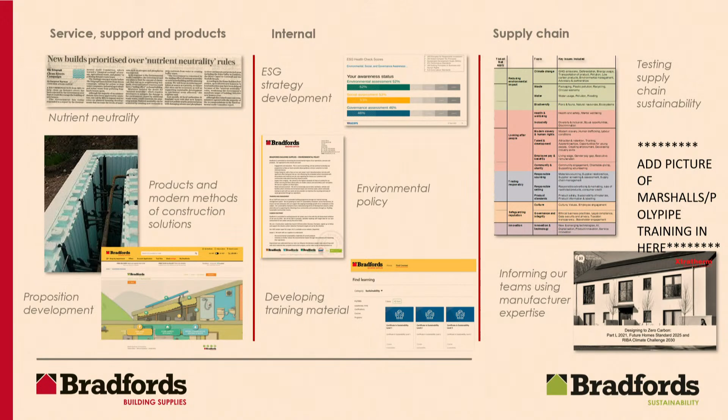You'll no doubt have seen in the press lots of bits and pieces around nutrient neutrality into watercourses. I'm very proud to stand here and say we're part of the group here in Somerset championing the effort to drive behaviour in government to unlock the moratorium on planning that's going on. So that's part of our responsibility.

And then, of course, we've got to make sure we're helping you build ready for the future. That's where making sure we have what you need, and making sure we've got a way for you to access that, is important. I'm going to talk about that bit on the bottom left of the slide in a second.

But it would be remiss of me not to talk about what we're doing at Bradfords. It's all very well us coming here saying, hey, you need to build ready for the future, you need to be putting in all these cool new products, you need to be thinking about net zero and all the rest of it. What are we doing? How can I stand up here and justify that we can host this conference, look you in the face and say we're going in the right direction?

I'm going to keep it really high level this evening. We kicked off our Sustainability ESG project in April, to look at our strategy through the lens of sustainability, but more importantly, to do it in a really robust and structured way, to ensure we're focusing on the right things and getting into the right position to make sure Bradfords is truly practicing what it preaches.

I really look forward to sharing the output of that with you as it develops, and for those of you in the crowd from Bradfords, sharing it with you guys as well. It's going to be a really important journey we all take.

The other bit that's really crucial is our training - getting our teams up to speed to understand what this future of building thing looks like. We've already worked with Cortexa, who support our trade federation and our training academy, to pull together a sustainability program, and we're pulling in loads more material from suppliers and further afield to make sure we've got a really comprehensive guide and information source for people to use. I'll talk more about how important that information source is in a second.

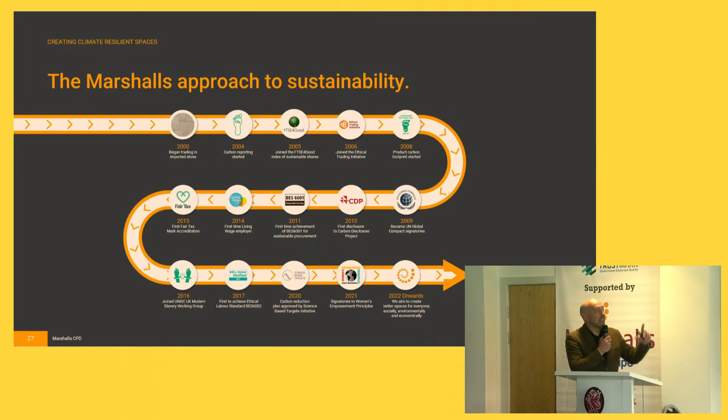Secondly, it's to point out the logos on there. We're keen to always align ourselves to the best methodologies and get external experts to validate our claims, so we're not marking our own homework. You can see there with the Carbon Trust, with the Science Based Targets Initiative, we've got external people validating our claims.

Thirdly, and crucially, you'll see there's a lot about people on there. Any sensible sustainability strategy puts people at the heart of it. So the living wage, fair tax, the modern slavery work that we do - that's why we're doing it all at the end of the day. It's really important to bear that in mind. I haven't got time to talk about that today, so I'm going to mainly talk about the environmental stuff.

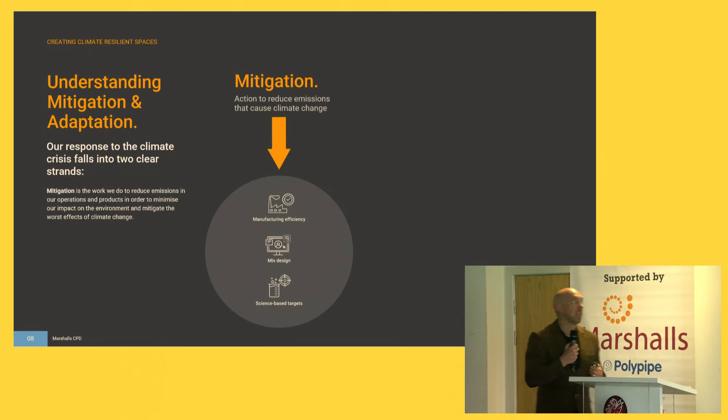Understanding our environmental sustainability approach, it falls really clearly into 2 strands. First, mitigation - what we can do to reduce our harm on the planet and mitigate the worst effects of climate change. And adaptation - the acceptance that as the human race we didn't do enough 15, 20 years ago to turn back the tide, so what do we do to adapt to the changing climate? A couple of things we do with water conservation and placemaking straddle both areas, but think about your climate response in terms of what you're doing to mitigate and what you're doing to adapt.

On the mitigation side, we've done loads of work internally. We've reduced our carbon footprint by 50% between 2018 and 2020. We've reduced a minimum of 40% of the cement that we use in our concrete blocks. So operationally, we've done a lot of work.

Externally, though, we're helping our customers make the right choices. We've published our carbon footprint since 2008 - you can find those on the website. Those carbon footprints are calculated for us by the Carbon Trust, so as I say, we're not marking our own homework. There's some credibility in that.

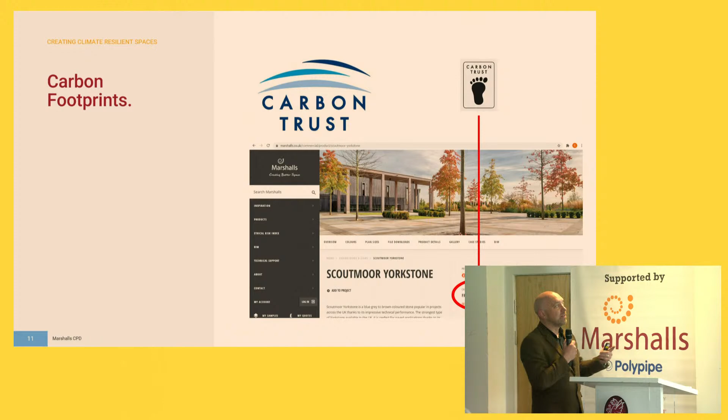I've got a plea to make while I've got your attention. When you're asking for this data - because data is really important - make sure you check the veracity of the data you're getting. Ask for the footprint boundary, that's absolutely crucial. Who's measured the carbon footprint? What methodology have they used? For example, we've always quoted cradle-to-grave carbon footprints, which covers the whole life cycle of the product. Plenty of people measure cradle-to-gate carbon footprints, which is basically the manufacturing process up until it's ready to leave to go to site. Both are completely legitimate, but both give completely different numbers. So when you get the data, interrogate it, make sure you're comparing apples for apples, and make sure your suppliers are being credible about what they're sharing.

On that note, because there's obviously a lack of consistency and standardization in the space at the moment, we've got great hopes that that's going to come in the form of EPDs. A lot of your suppliers will be presenting you with EPDs - we will be doing so very soon, I can assure you, there's a big project underway to do that. That makes it really easy to make like-for-like, apples-for-apples comparisons between different products. So look out for those.

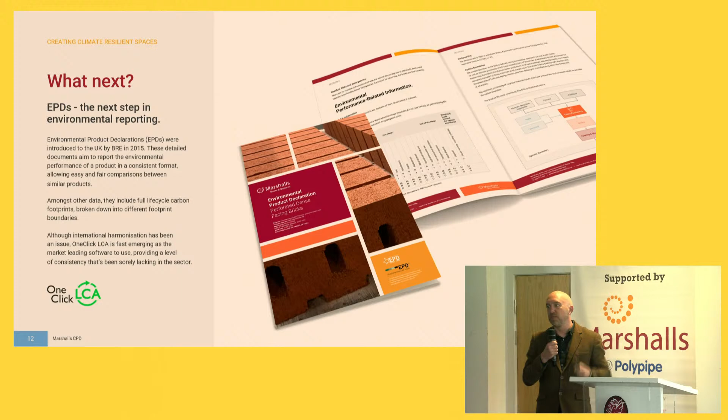It sounds very onerous, though. A lot of the stuff we do about mitigation costs us money, takes time, takes a lot of resource. There are opportunities, though, and just to give you one now - not a lot of people know that concrete sequesters carbon. It reabsorbs carbon over its lifetime, that's just a feature of the way it hardens, the way it cures.

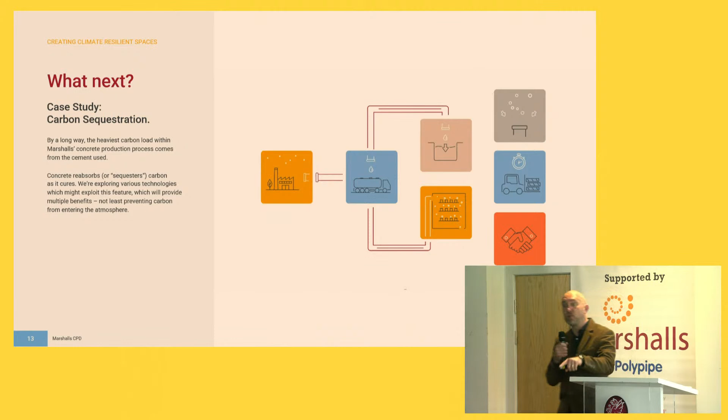That presents us with an opportunity. If we can introduce excess carbon into our mix process or curing process, first of all that carbon isn't going into the atmosphere, so that's providing an environmental benefit, which is what we're here to do. But it also means our products achieve strength faster, which means we can get them onto your yards quicker, which means our production efficiencies increase, so we can make more money out of that too.

And say it quietly, we might even be able to charge other businesses for a carbon offsetting role as well. So when you start getting into it, you find that a lot of sustainability work, as well as being onerous, can also provide you with opportunities.

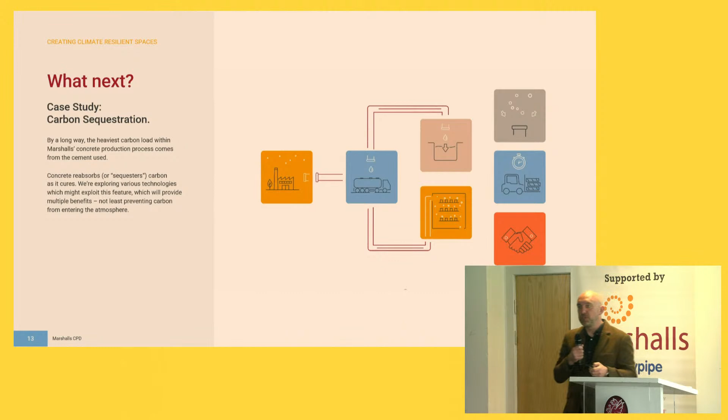Onto the adaptation side then. This is a very quick whistle-stop tour of some of the themes you might start seeing. We know the climate's changing. One of the first impacts is flooding, and you see that down here more than a lot of other people, to be quite honest. So what are some of the solutions?

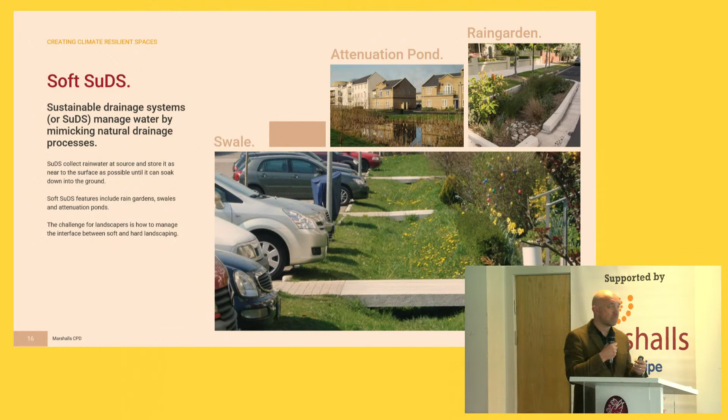Soft SUDS, sustainable drainage systems, introducing green infrastructure into urban spaces in the form of rills, attenuation ponds, swales. You're going to see more and more of that, and your customers are going to be asking questions about it. The challenge for us is to come up with systems and products that make it easy for people to integrate those systems. The challenge for you is to understand what they are when people ask about them, and to come back to us and ask us for what they need.

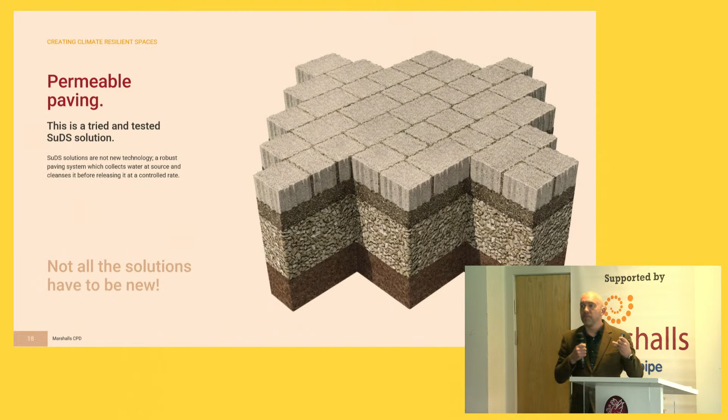Other solutions - permeable paving. I've got to plug this, I've talked about nothing else for 10 years. Not all the solutions are new. This is a brilliant way of managing surface water at source and providing a controlled flow of clean water.

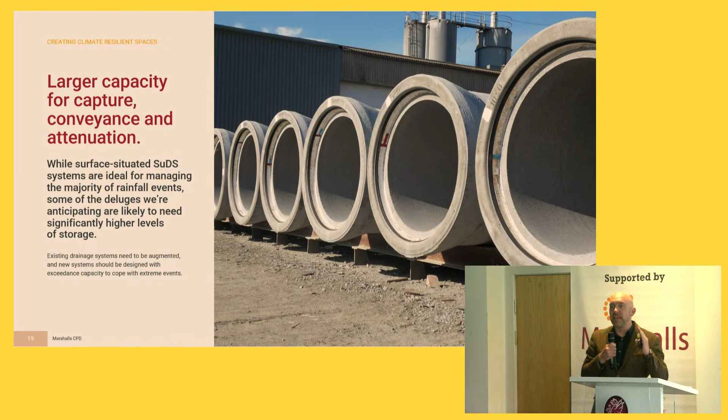In addition, though, we have to accept - and I'm a sustainable drainage purist - we have to accept that sometimes you're going to have to bury water underground in large tanks and pipes. What we talked about this afternoon was all about: in order to mitigate flood risk, we need to use the right tools in the right order at the right time. It's not that one's better than the other, they just have to be used at the right time. So that's something your customers are going to be asking about more and more.

Another issue thundering over the horizon is that cities are going to get hotter, so they're going to be very uncomfortable to live in, work and play and move around in. So what can we do about that?

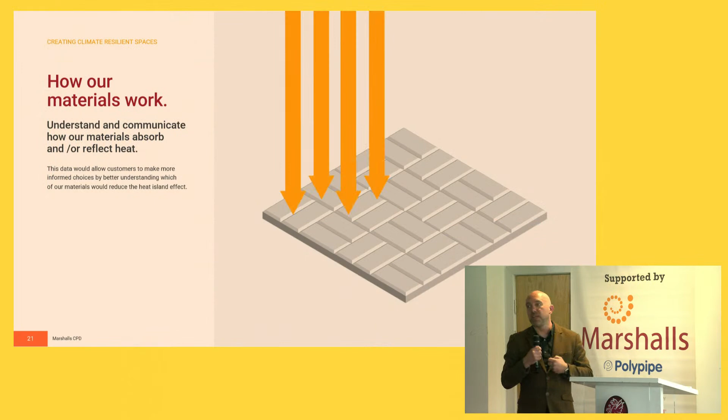From our point of view, we need to understand better how our materials react under heat. How do they absorb heat? How do they hold on to heat? And how do they release heat over time? If we can give you data about that, you can help your customers make the right material choices to design the urban heat island effect out of the spaces they develop.

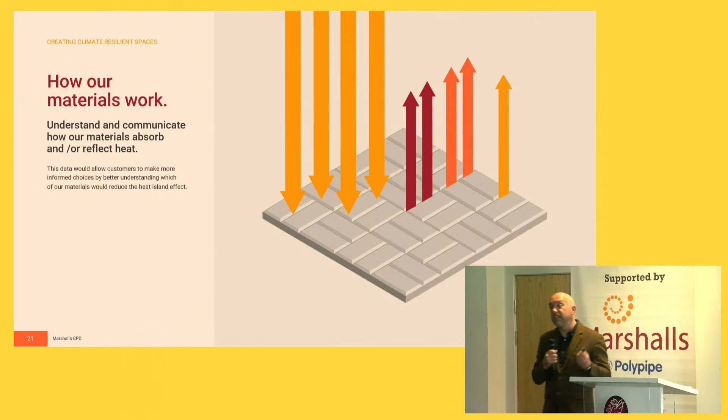Another solution is, surprise surprise, introducing more green infrastructure. Trees provide canopy cover, evapotranspiration, biodiversity benefits, and air quality benefits. Introducing green infrastructure into urban spaces is not easy, though, so again we've got to come up with products and systems that make it easy for you to integrate those.

I think the point I'd like to make is I work for a hard landscaping manufacturer - we're the biggest in the UK, we sell a lot of concrete. And if I'm telling you that we need to start introducing soft landscaping, I think it's time to pay attention. That's as much as I wanted to go on about, and Giles didn't trust me that I'd keep to under 10 minutes, so I think I've won.

When you're talking about products, there's two things they can do. Think about what it's made of and how it's made, but also think about what it does as well, and pass that on to your customers.

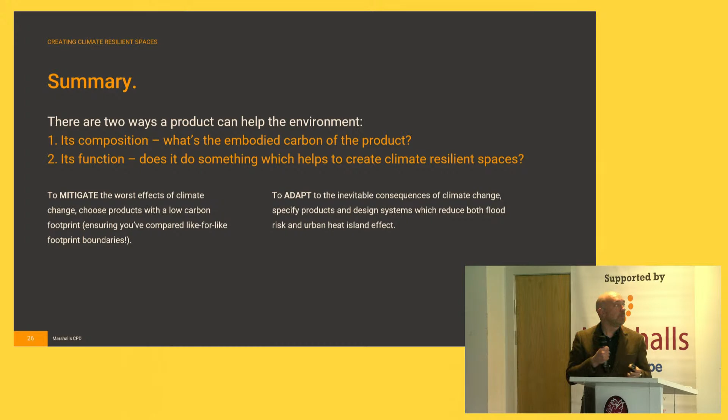Right, hi everyone. Yeah, my name's Tomas Gaertner. I'm an architect and passive house designer. I'm not a lecturer or scientist or researcher or anything like that, I'm a practicing architect.

In our practice, we specialize in sustainable design, and we have been specializing in sustainable design for the last 15 years. We don't do anything else but passive house in our practice, or similar high-performance standards. Our projects span from larger scale residential projects to offices, schools, higher education, and also, most recently, the new passive house swimming pool in Exeter that we've been involved with.

And that drives all our projects, which focus very much on healthy, high-performance, human-centered design. Today I will give you an idea of what sustainability means for us, and what we mean by that when we talk about sustainability.

Because there's also misperceptions in sustainability. Quite often, when we talk about sustainability, we focus far too much on what we need to do - energy, low carbon, resource efficiency. We rarely focus on why we need to do that, because everyone feels that's obvious, because it's about environmental issues in general. So this is very much what today is about - it's more focusing on the why.

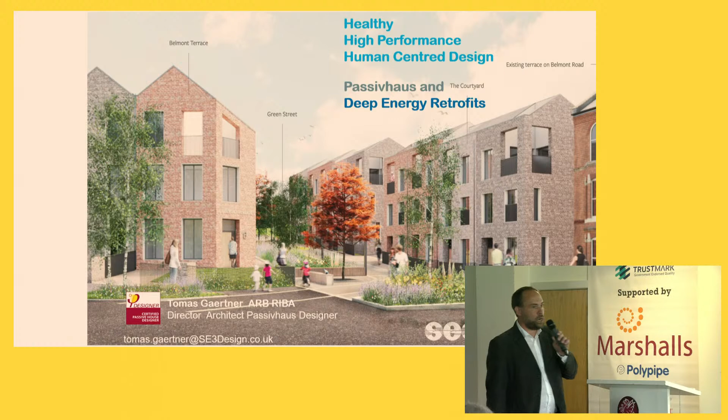I'll give you a quick overview of that, and then I'll show you how we apply that in one of our projects, which is actually a retrofit project as well. So when we talk about sustainable design, what is sustainable design?

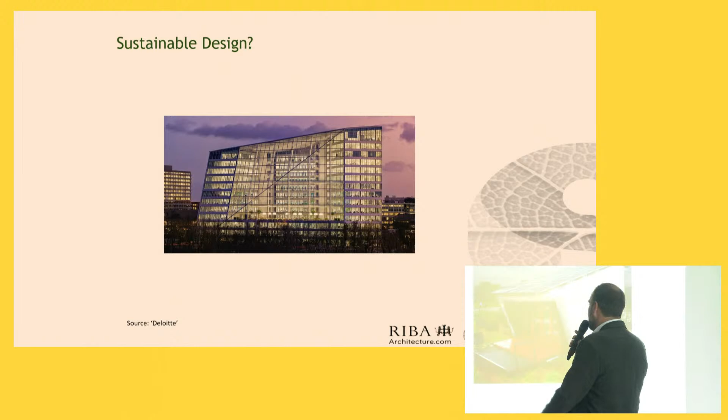This one here is more obvious what it tries to achieve, in terms of insulation and energy efficiency and what it does to that. Now, is that sustainable design? Possibly in some aspects, but not necessarily at all.

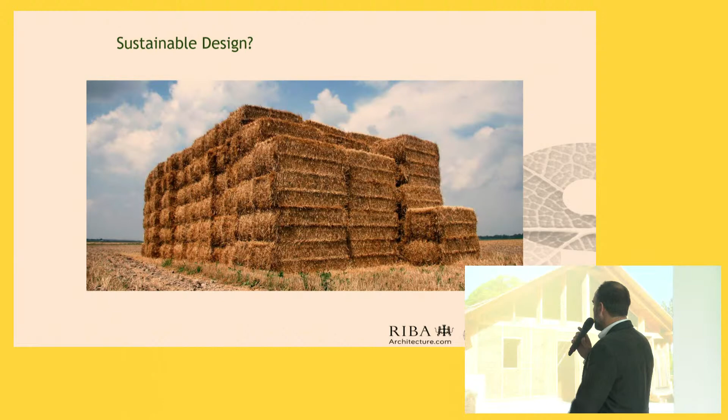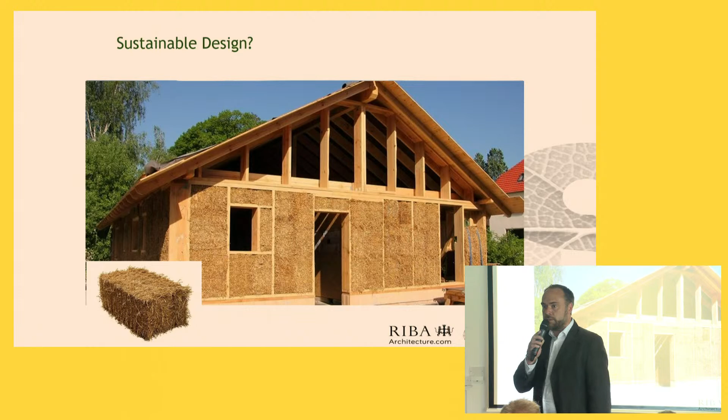And sustainable design is also about materials - using regrowing, renewable materials, fast regrowing materials like wood, timber, cellulose, these kind of things, but also straw. There are buildings made out of straw, of course, on a small scale. There's a 5-story office building which opened its doors 2 years ago in Germany, entirely made of straw in the external walls, and it performs to passive house standard. The materials for that building have grown within a year. That is sustainability. When you look at a tree and claim that's sustainable - a pine, a spruce, needs 40 to 70 years to grow to a size you can use for construction timber. It takes quite a while for these timbers to regrow, and that needs to be considered as well.

And what's sustainable as well? A lot of sustainability is also about this one here - getting a T-shirt, getting a certificate, getting some reward for it. And that is important, don't get me wrong. We do that a lot as well in terms of getting these certificates for our clients and getting the reward. You need these rewards because you not just need to boast about it, which is important, but it also celebrates achievement, communicates this achievement to others, and inspires. That's why these T-shirts are important, and we shouldn't just put them aside. They are mainly marketing tools, to be fair, for everyone. We use them as well.

But why are we doing this? This is all just about what - it's about low energy, about reducing carbon emissions, these kind of things. But what is driving sustainability, actually?

The key driver for sustainability, obviously, is carbon emissions. It is the biggest challenge of our time, and still remains one of the biggest challenges of our time and times to come. The reason why it is the biggest challenge is because we've ignored it for more than 40, 50 years. Since the mid-60s, we know that human-made carbon emissions are changing the climate - we've had scientific evidence that we're changing the climate through our doing. And we've not done enough for this.

This one here is the carbon countdown, and this is a good example why suddenly carbon emissions and the climate emergency has jumped on the agenda - why councils are committing to drastically reduce their carbon emissions by 2030. If you talk to the industry, quite often what I hear is that it is completely unachievable and an unrealistic result. Of course it is unrealistic, because for 50 years we've been sleeping, not doing anything about it really, and we've been using the same excuses not to do anything about it.

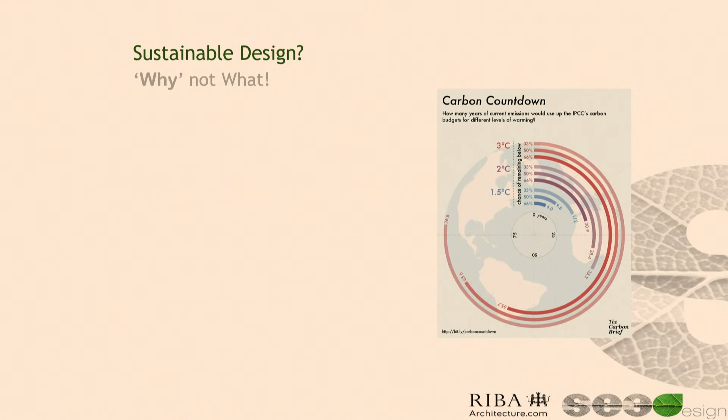If we want to keep carbon emissions to 1.5 degrees, which most scientists, 97% of them, believe is a safe target to avoid catastrophic climate change, then you can see here, to have a 50% chance of achieving that, we have 9.8 years. That takes us to 2030. A 50% chance to avoid catastrophic climate change also means a 50% chance of missing it.

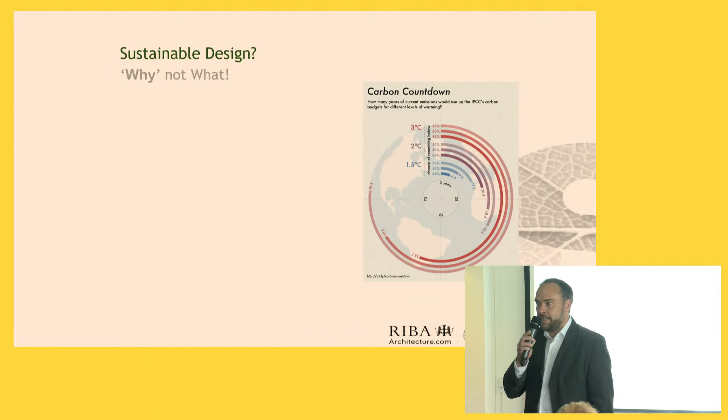The 2030 target is not an ambitious target. It is our final chance to avoid catastrophic climate change.

And here is a second misunderstanding. When scientists talk about catastrophic climate change, they do not mean really hot summers, awful weather and rain. What they mean is avoiding tipping points.

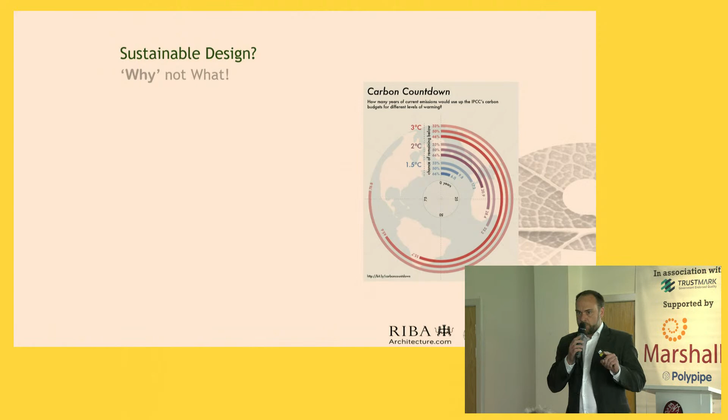When scientists talk about catastrophic climate change, what it means is that if we reach or breach this target, then we trigger quite likely automatisms, like the melting of the permafrost, the melting of the ice caps, the reduction of the Amazon rainforest. Each of these events has a global impact of a scale that we can't reverse, and that will trigger the next one, and the next one, and the next one.

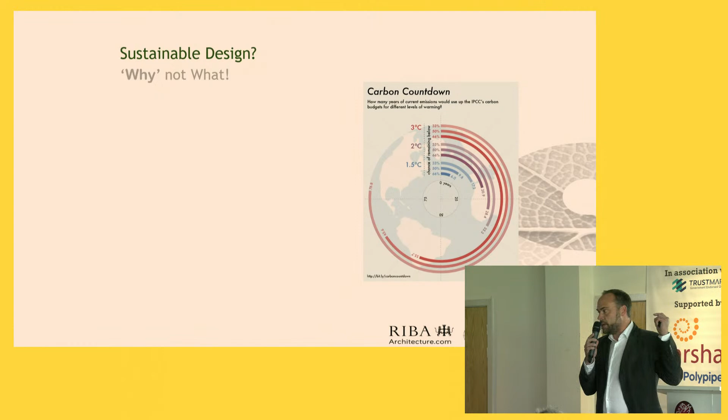And if we fail this target, we're not looking at 2 degrees, we're looking at 4 to 6 degrees, which we can hardly do anything about, even with carbon capture and storage. That's why this is important.

And of course, it's not that we haven't done anything about it. We have achieved great things. Lots of money has been invested into carbon energy efficiency. Two years ago, annually, $230 billion were invested worldwide into energy efficiency, carbon reductions, and so on. It's a massive market, and governments have been active. It's not that nothing has happened there.

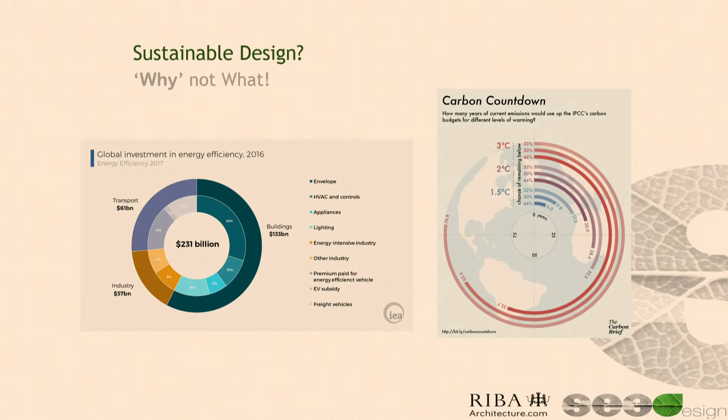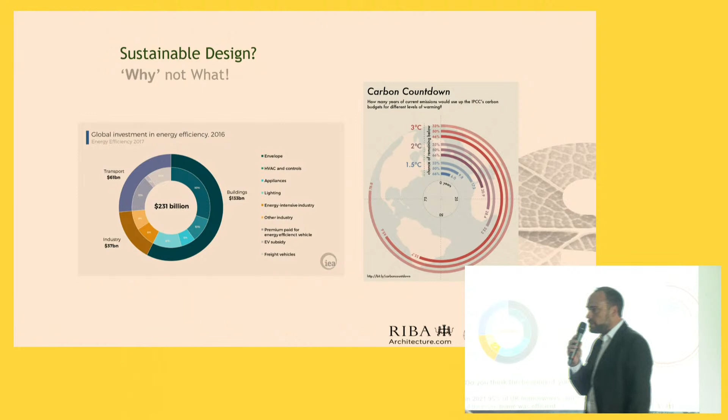The problem with this one here is that it hasn't done anything. Over the last 30 years, we've achieved hardly anything. 30 years ago, a third of carbon emissions came from buildings. Last year, a third of carbon emissions still came from buildings. All the improvements in energy efficiency, in building regulations, all of that, statistically and overall, has done nothing in the UK.

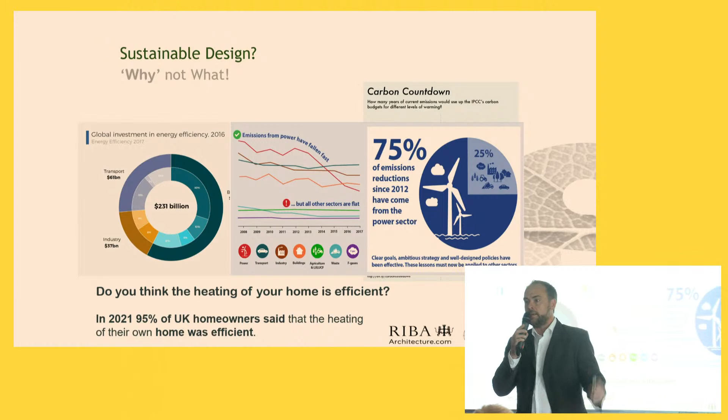This one here is a graph from last year from Ofgem, showing carbon reductions per sector over the last 10 years. What you see here is buildings, the orange one. Nothing has changed. We're still emitting 30% of carbon emissions from our buildings. The only sector that has come down is power.

That's the only one that overall has reduced carbon emissions in the UK, and that's why we got off coal and reduced some output from industry, and that is the main impact on reducing our carbon emissions in the UK.

And of course, the government has realized that all the measures they've done over the last 20 years have done hardly anything overall. In small projects, yes. But the strategy of managing carbon emissions on the micro scale, house-by-house, has essentially failed on the overall picture. So the government two years ago changed their tactic.

And what they're now doing is looking at the macro level. Rather than focusing on zero carbon on each and every building, like the Code for Sustainable Homes used to do, they're now focusing on the energy supply. Essentially, they're moving our heating sector from gas onto the electricity sector.

We then make that electricity sector carbon zero, and if the energy we use in our homes is carbon zero, it doesn't matter how much you use — it's still zero carbon. And this tackles two things: it tackles new build and existing buildings at the same time.

But of course, there are some issues with that. The main issue here is cost. If you move your electricity bill, your gas bill, your heating bill, which is mainly driven by gas in the UK, onto electricity, you will have a significant price increase. At the moment, on your average bill, gas makes up roughly half.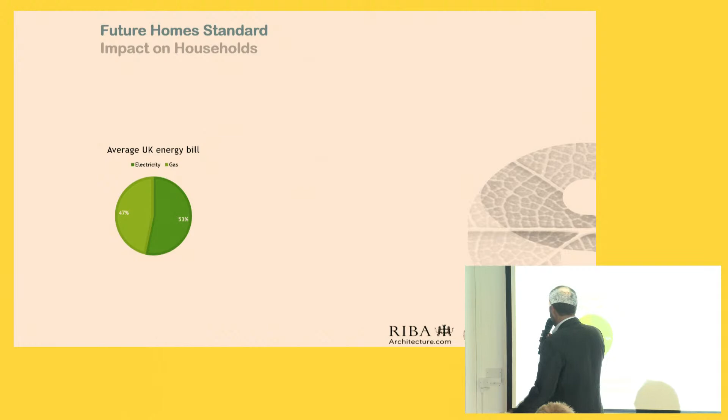That used to be, in 2021, an energy bill of £1,350 a year. That has already gone up to an estimated £2,300 this year, estimated at the beginning of the year. Now, today, the government announced you'll get £400 back from the government.

But they also expect another £800 price change by the end of the year. You'll easily pay on average £3,000 a year for heating, hot water, and energy by the end of the year. That's what the statistic says at the moment.

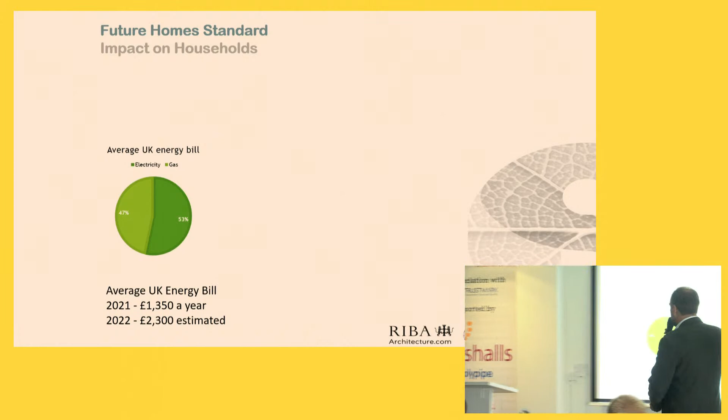Now, the problem here is you haven't changed from gas to electricity yet. If you change from gas to electricity, what will happen is that section here, which is gas at the moment in your overall amount, only makes up this bit and still contributes only a fraction to your energy bill, although half of your gas comes actually from there.

Now, gas at the moment makes up 47% of your energy bill. If you move that onto electricity, then what happens is we will easily quadruple your prices for that, because gas is still only a quarter of the cost of electricity at the moment.

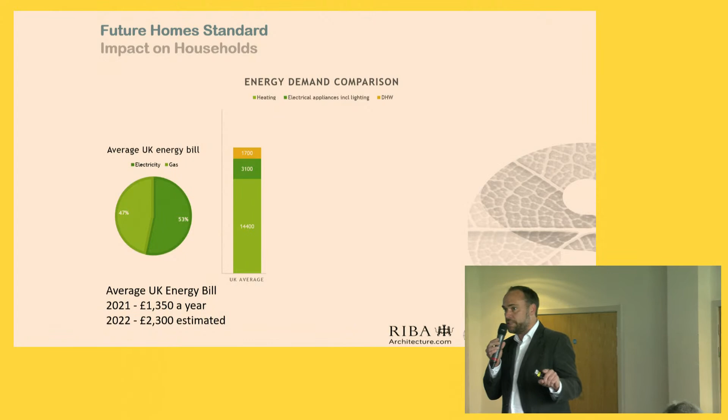And if you move from gas to electricity, which might be clean, green, zero carbon electricity, your prices will go up significantly for the same thing.

Part L and future home standards will only result in a marginal saving of 20-25%. That's all what you can achieve with the measures in there. And that will leave you, once this transition has moved on, without any further price increases or inflation, just a move from gas to electricity from £2,300 to £4,750 a year. And this is something that will come over the next 3 to 5 years.

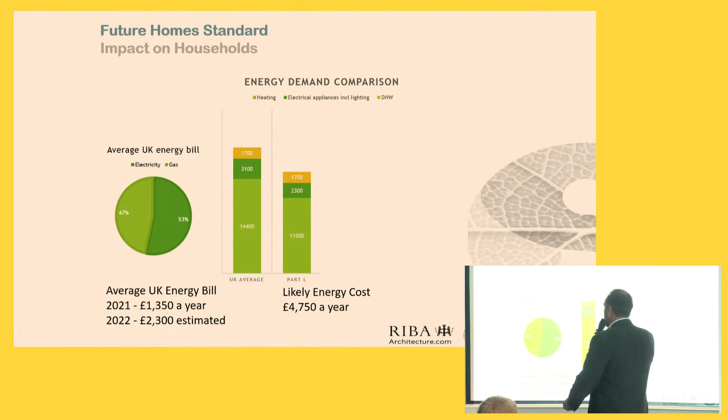However, there's another thing to this, because we haven't allowed for inflation. This inflation element comes from this one here - the total electricity supply in the UK at a half-hourly rate. This is everything in the UK, all industry, and so on.

You can see two things here. One is more obvious: it's very even over the entire year, because that's what electricity supply is like. We don't store electricity like gas. Electricity is produced whenever there's a demand. So when you switch something on, that's when it's produced and supplied. Renewables don't work like that - renewables you get when the wind blows. And that's important to understand.

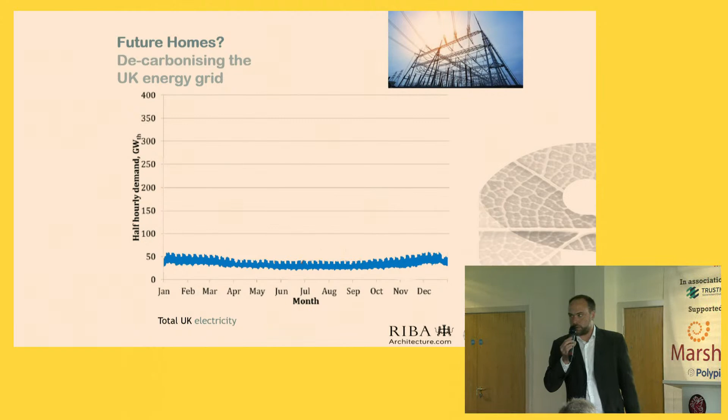At the same time, our heating demand is not even over the entire year - we have peaks and troughs. The other thing, which isn't as obvious here, is scale. If we overlay the actual heating demand half-hourly in the UK onto this one, this is what we're looking at. The heating demand, in terms of peak, is 6 to 7 times the electricity we produce in this country at the moment. It took the government 10 years to produce 40% of that with renewables.

By 2030, the government has promised to supply all the red stuff there through clean, green offshore wind power. That will require enormous investment from the government, and in the end, tax increases - but also, who will be paying for it in the end will be us.

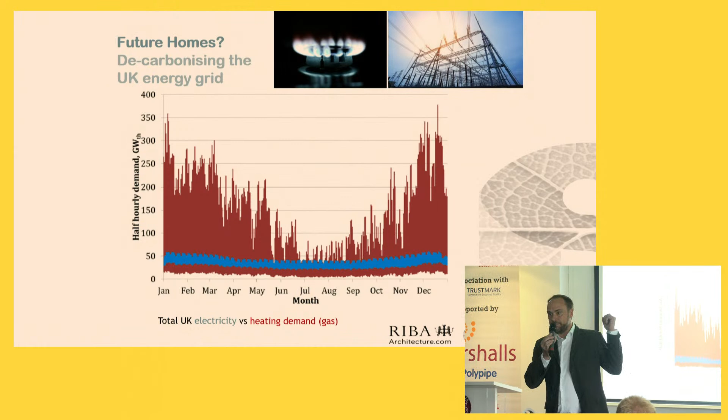That will mean energy prices will easily go up 2 to 3, 4-fold over the next 3 to 5 years. What you've seen so far this year has nothing to do with carbon legislation - this is still to come and goes on top of that. We could easily see energy prices over the next 3 to 5 years for the average home rise up to £8,000 to £10,000 a year. And that's probably optimistic.

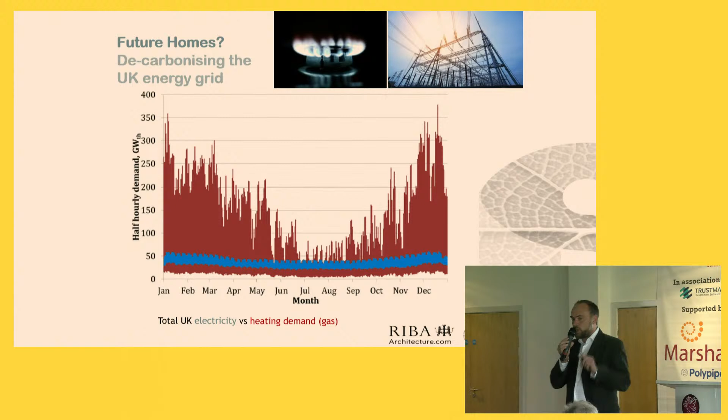This will drive change - not legislation in terms of saving carbon, not legislation in terms of reducing your emissions and all these kinds of things. It will cost you an arm and a leg if you need that amount of energy to heat your home and keep comfortable.

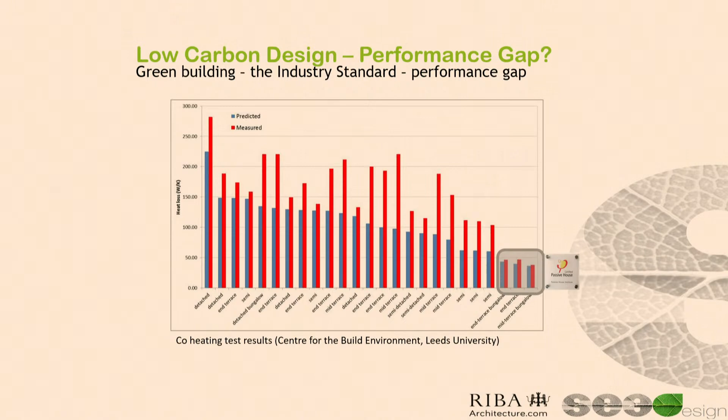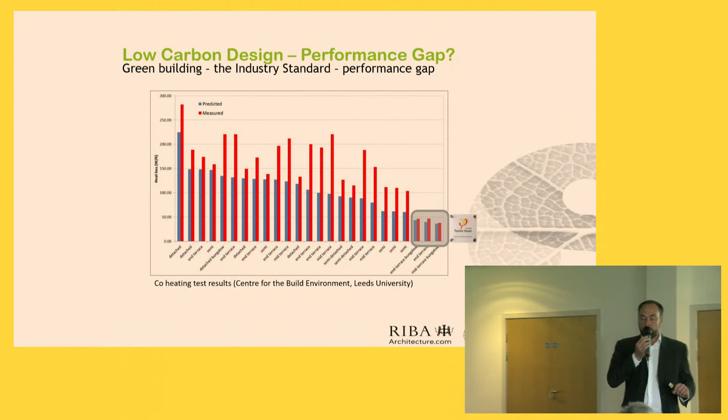The second thing is, passive house as a design methodology has been developed on measured, completed projects over the last 30 years. Everything learned and tested on these existing buildings was fed back into the design methodology, how you design better buildings. That's what makes the robustness of a passive house. Passive house has a track record of predicting that, and even these ones failed to accurately predict it.

Also here, the actual demand was 5 to 10% higher. But in a passive house, you can heat a typical 3 to 4 bedroom home for £100 a year. If that goes up 10%, my client pays £110. If it fails and I'm 50% over, that's £50 more a year. It's still a success - it doesn't really matter.

If I'm in my normal house and I only save 10% on my 2,300, I'm down to 2,200. If that goes up 50%, instead of 2,200 I pay over 3,000 - I'm very disappointed, I can tell you. That's the difference with a passive house.

And what that makes, in terms of what we're looking at here, the passive house sits down there, and it captures exactly those savings on gas and fuel, domestic hot water demand, and heating that we're looking for with a passive house development.

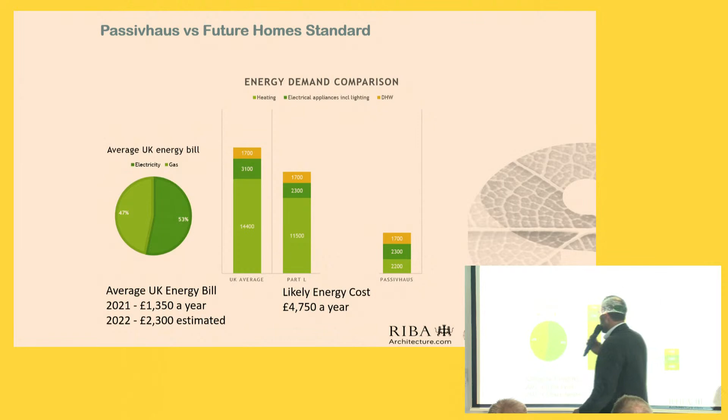And what is a passive house? A passive house as a standard is a relatively simple building. I'll take you through that - it's quite often reduced to energy criteria, but what a passive house actually is has 3 criteria you have to meet: an energy criteria, a comfort criteria, and a hygiene criteria.

The comfort criteria means this: we're not achieving comfortable living environments by sticking in a radiator. We're achieving a comfortable living environment through building fabric and design. We implement a high-performance fabric, lots of insulation, triple glazing, and an airtight building envelope so that we have no drafts within that building, creating comfort even in the middle of winter just through that building fabric.

In terms of hygiene criteria, we're avoiding any condensation issues through high-quality, detailed designs, thermal bridge-free designs, plus a ventilation system that constantly provides fresh air from the outside at optimum rates - no recirculation, no air conditioning. We're not compromising on air tightness, air quality, or issues around mold and condensation. It's a high-quality environment in terms of comfort, air quality, and materials.

Only when we've achieved that, then we reduce the energy demand by 90%, to a level where a typical 15 square meter living room in the UK, in the middle of winter, 0 degrees outside, you can heat with 5 candles. If you achieve that, that's a passive house.

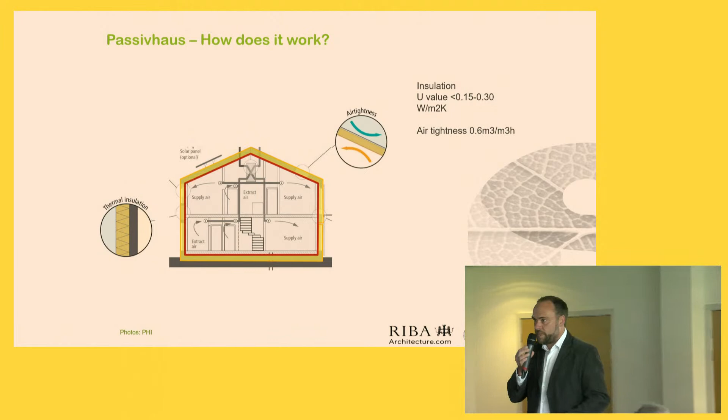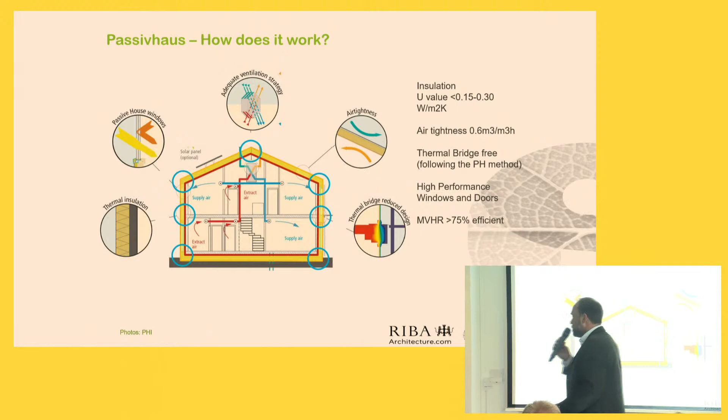We do that with exactly the same measures as you would do in a normal building: lots of insulation on the outside, floor, roof, facade. We then want an airtight structure. We're focused on unwanted infiltration, not airtightness in terms of no ventilation, but infiltration through gaps and cracks in the building fabric. Then we have thermal bridge reduced design, so we look at all the junction details. We have high performance windows and doors, typically triple glazing with these kind of systems. And then we have a considered ventilation strategy, usually a whole house mechanical ventilation system when you look at new build properties. The same principles are designed nowadays into any housing scheme you'd find, just put together in a passive house in a more considered way, more focused on design.

Just one example now, very quickly. I'll run you through this one here. Shouldn't take that long. How much time do I have?

This one here is one of our examples, a retrofit project we were involved with 2 years ago for Exeter City Council, for Sanctuary Housing and also for North Devon Homes. We split it across 3 sites, where we looked at how we can retrofit this project with minimal impact on the residents. Residents were to stay in place, and we aimed to reduce the total energy demand of this building, including appliances and everything, by 90%.

We didn't just look at this one, Exeter City Council chose it. We actually looked at 6 of these properties, all the same. The main reason was that Exeter wanted to develop a prototype they could roll out on a larger scale. First the 6, and then in the follow-on project, the entire road of, I believe, 26 homes the second time. The reason they chose this isn't because they only had these 26 homes to refurbish, it's because Exeter City Council have 3,000 of exactly the same homes in that area. These are typical 1950s council estates.

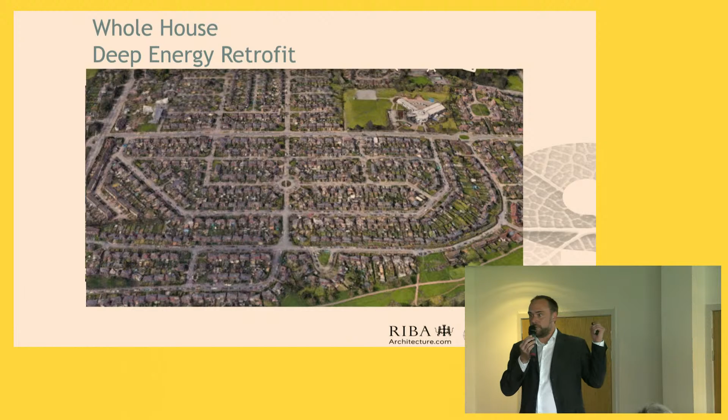And of course they have all these negative things. When it comes to architecture, for example, it's very much copy and paste. They have issues around quality. But the big benefit and the chance in terms of carbon emissions is, we have here a prototype, they're all the same. They're from the same time, same maintenance issues, same maintenance cycle, same work needed, same orientation, exactly the same buildings. You crack one of them, you crack them all. That's the approach: develop a cost-efficient version to retrofit one of them and then roll it out.

This was done using a system called Energiesprong. Energiesprong is a system to achieve net zero energy over the course of a year. The system is subsidy-free, it's paid for through the energy savings from the residents. The landlord takes up a loan to finance this, gets the energy payments the tenants are currently paying, and uses that money to pay back the loan to upgrade the building over a 30-year time span.

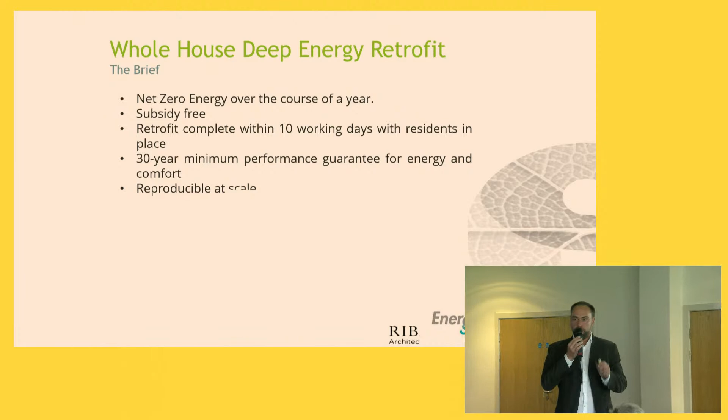The benefit is that tenants, although they don't save on energy in the last year, aren't exposed to rising fuel prices, because they pay a fixed fuel charge for heating and hot water. So they're not exposed to fuel poverty and rising fuel prices. The landlord gets a new building fabric, new services strategy, new components, and maintenance-free for 30 years, paid for through these energy savings. And of course the planet gets the carbon savings, a 90% reduction, closer to addressing the climate emergency. So it's win-win-win for everyone on this one.

And the way that worked is, with these buildings, first of all you strip them back and you find exactly the same things you find with any building of this kind. You find the wall ties rotten, roof trusses rotten, and all these kinds of things that you have to tackle at the same time.

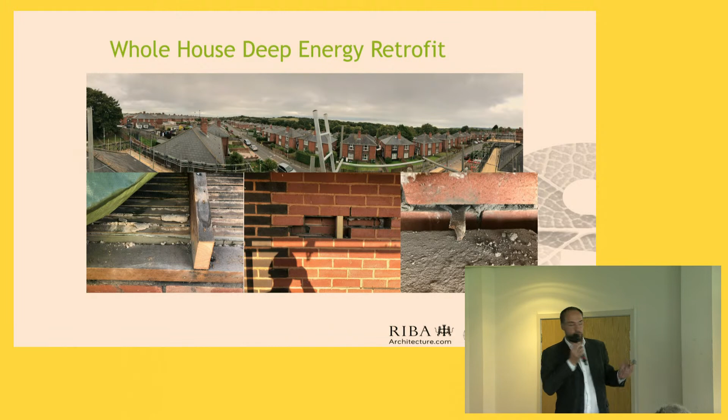Energy savings and carbon savings will not pay for these kinds of things, so you have to allow for some maintenance money in that pot as well. That's not the purpose of this project - it's about upgrading them, but you have to bring them back, and that's what you can do. This one here was no different.

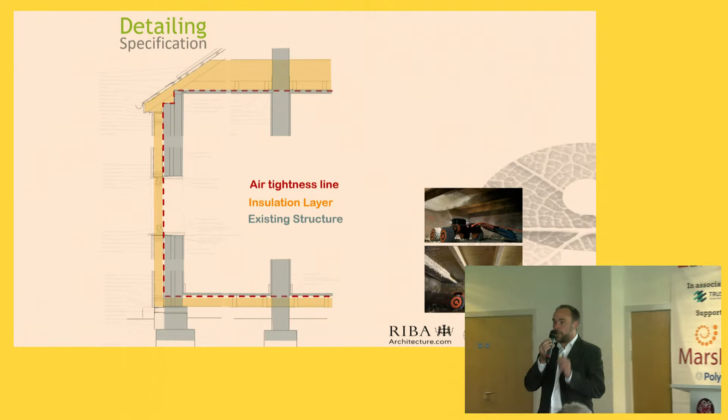In terms of construction, the existing structure is this one here. We insulated it from the outside - roof, floor, and wall - then put an air tightness line on the outside, which was a paint-on membrane. The floor was insulated with robotic insulation, the residents staying in place, and these properties are retrofitted with residents in place in 10 days per property.

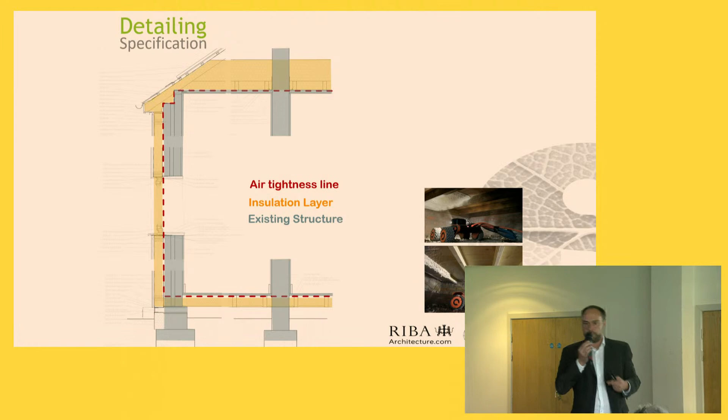So we have a highly prefabricated solution. The floor insulation is a robotic installation - a small robot drives into the floor void through a small hole, takes a 3D survey, calculates the optimum way of insulating, then sprays insulation between the joists underneath. After that, it carries out a thermal imaging survey to check there are no thermal bridges or spots left, carries out retrofit measures, and then you get a full report that it's been insulated. Next, we had pre-insulated panels.

They came as one facade section for the ground floor and one for the first floor, with windows installed and finishes in place. They were then lifted onto the wall - that's where they came in. They were installed onto brackets at the bottom, going in with the windows already in there.

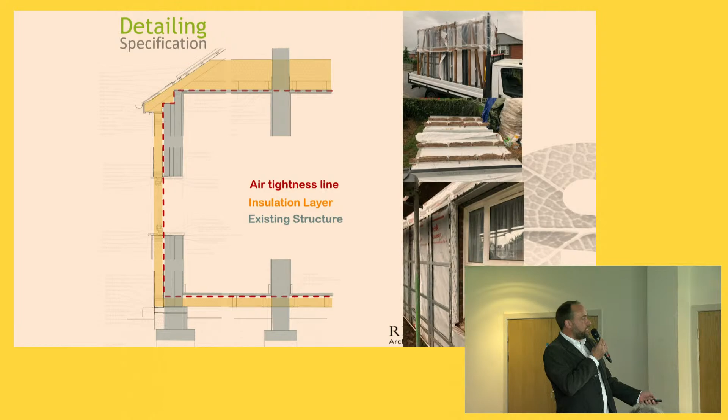After that, the windows were taken out from the inside - that's the only measure that happened on the inside - and the window reveals were made good. They came, as you can see, with a finish applied on the outside already.

Then mechanical ventilation was installed, a room-by-room system with vents like extract vents, but with mechanical ventilation heat recovery, so they also retain 70% of the heat in these buildings. Then the roof was made airtight with a paint-on membrane and insulated. The roofs were then covered in photovoltaics.

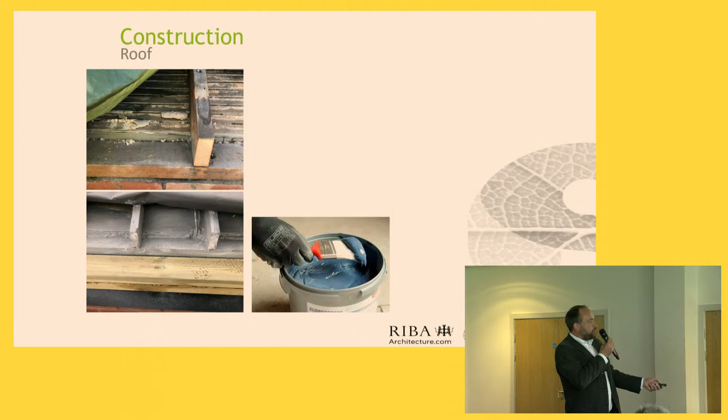Here you can see how this system was meant to work - we could get economy of scale not by doing one by one, but through a rolling process. That's what this pilot was about: the contractor's team starts on one building, and when finished, they don't move to another site, they just move to the next building, and the next. Suddenly, out of a 50 square meter project, you get something that in real life becomes like a 2,000 square meter project, which becomes interesting in terms of economy of scale and brings costs down for these retrofit measures.

The same we did with the energy. All these were fitted with ground source heat pumps, included in an energy pod like a small garden shed. That garden shed was factory fitted with a hot water cylinder, a battery inverter for the photovoltaics, and a ground source heat pump produced in Cornwall.

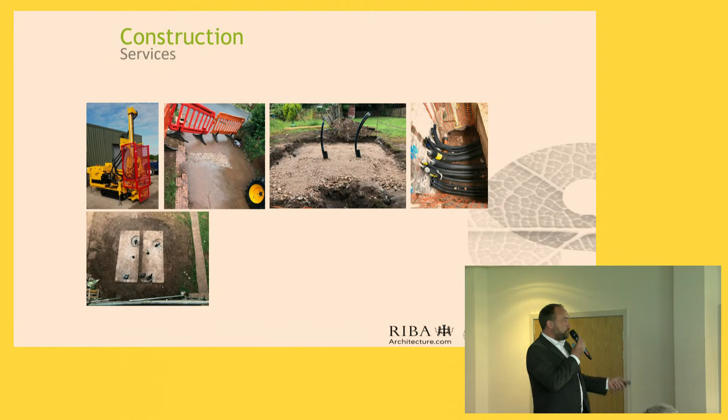That came in these boxes, and you can see how that was fitted in. The boreholes were put in, a small foundation cast in concrete in the backyard, and then these boxes were installed, including all this equipment. Then the internal gas boilers were disconnected, and this system was plumbed into the existing system to provide all the hot water.

This is what they looked like before lockdown, two years ago - I haven't been back yet to take a better picture. But you can see the new facade, the extended ridges, and how this has been achieved. This has achieved a 90% saving on energy reductions, but also 90% carbon savings, and tackles fuel poverty at the same time, subsidy-free, to Passive House standard. Thank you.

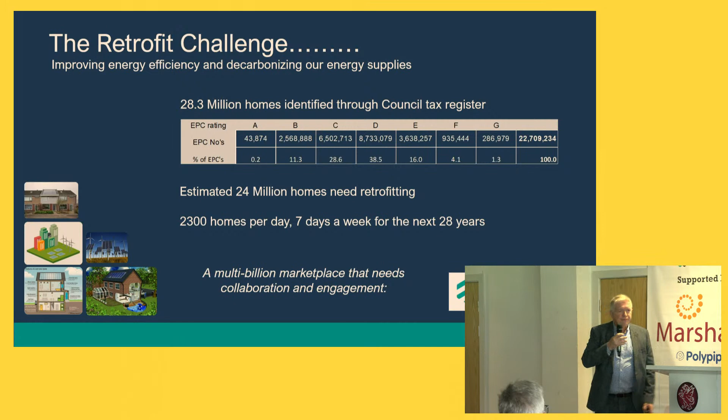So people are now becoming more interested in how they retrofit a property. How do I reduce my energy cost? You have to look at the scale. I think Tomas was, in a way, showing a really big scale of what could happen as we move to electrification, as we move away from habitually what we've known for many, many years. So there is a real challenge in front of us.

And I think here, when you look at this diagram, a really simple diagram, I get asked many times, what's retrofit? Because we all assume everybody knows retrofit. You talk to your consumers. If you're a consumer and you look onto the internet, you will get so much information. Within about 20 minutes, you will be completely confused, not really understand what you're doing, and you will be thinking, I don't know where to go.

Retrofit is about taking an asset, a property. It's about insulating the property, fabric first, windows, doors, insulation. It's about low carbon heating sources. It's about EV charging that's coming into play. It's around the heat pump generation that we're putting in. And it's about convincing consumers that it's the right thing to do, because actually a lot of what we do is costing huge amounts of money.

As an example, the bottom here, if you were to buy this house, and this is something we worked out with some lenders, over a 25-year period, on a standard asset as we move forward, you will pay probably between 2.5% or 3% on a mortgage. Your energy costs will remain the same, your asset value goes up slightly. If you look at borrowing slightly more on a mortgage, and if you look now for green mortgages, green equity release that's coming to the marketplace, you will get lower rates.

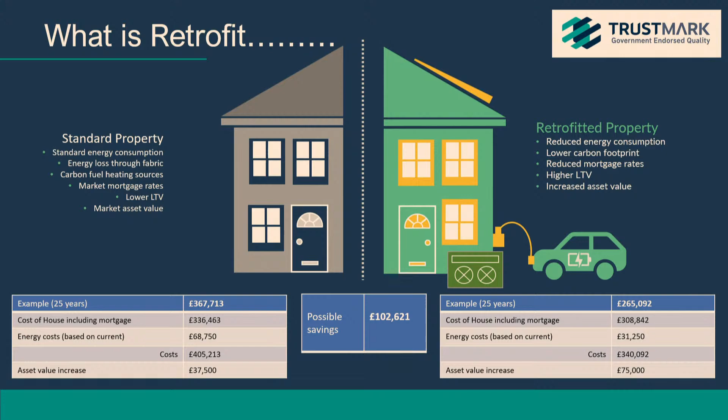You will get preferential treatment, which means when you go through that whole process, over a number of years, you retrofit the property, you look at your reduction in energy cost, but the extra asset value that you have created gave you £102,621 saving over a 25-year period. Examples, but worked on real life numbers at the moment. So if we start thinking about that, people think, oh, that's sort of not real. But when you bring it back to reality, at £80 per week for the next 25 years, that becomes real. That becomes a real impact on where we are today with energy. So we do need to think about how we move forward.

Help with energy bills, energy efficiency, healthier homes.

Sorry, it's my phone unfortunately telling me I've got to take a tablet. You always forget the one alarm, don't you? It's always the way. Yeah, phone switched off, watch switched off, the alarm goes off.

So, healthier homes. As another example, the health service funds about £18 billion a year due to the outcome of unhealthy homes, to people that live in homes where there are issues like damp, poor ventilation. 18 billion. So you start putting these numbers together, and all of a sudden, we have to do something to improve. We have to do something better. We have to move forward.

We have to save money. We have to support the transition to net zero. Won't get into the debate about net zero, too many definitions of net zero, and how you get there. And electric vehicles - I guess, if you're like me, 5 years ago, you drove down the road, how many electric vehicles do you see? Not many. How many do you see now? They're everywhere. They are coming in more and more, but they are taking more power consumption.

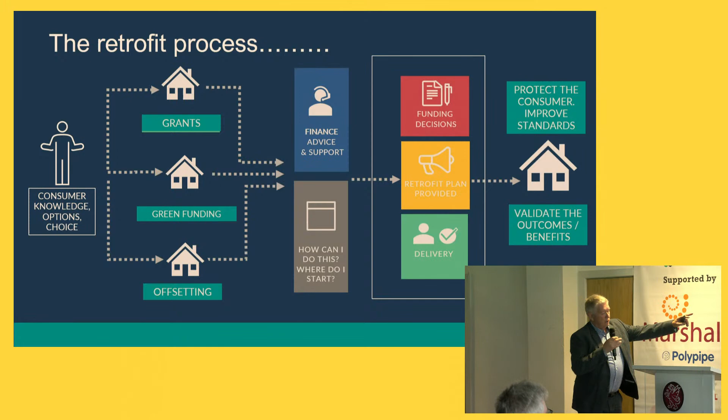We will see in the next 6 to 12 months lots of new software launched by banks to help consumers on that journey. Those banks will be looking for consumers to be supported on that process. They will be looking for businesses to help on that process. So it's really important that we get this right.

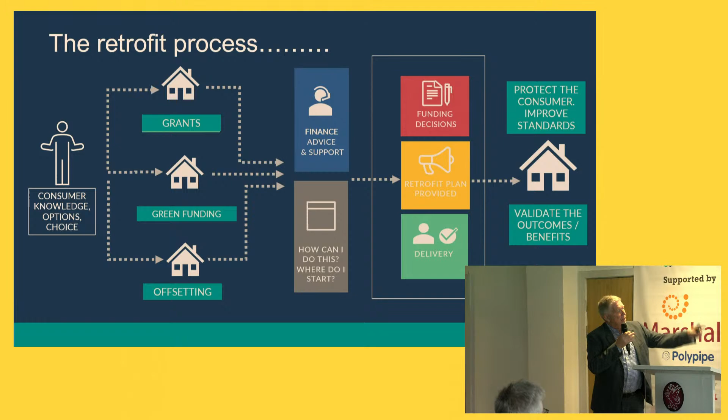Grants, green funding, offsetting. I'm pretty sure some of us in this room live in properties that may be EPC-D, and you're probably sat here thinking, how on earth could I get this to a B? It's solid wall, it might be thatch roof - it's a real challenge. Electrification can do some of it, but we need to be planning on how we do that, and offsetting can become part of some of that.

The finance and support, the how do I do this? This is no longer just coming in and changing a gas boiler, it's no longer just fitting a kitchen. The disruption that can take place when you retrofit a property is pretty intense, because you can be ripping up floors, changing roofs, doing all sorts of things. So people need to plan and need to understand.

But the really important thing is, at the end, I spend this money, I upgrade my property, I want to validate that I've spent that money for the right reason and I'm getting the right outcome, and I'm protected.

Financial protection - so we ensure that any consumer that has work done is financially protected, because the investment you're making is no longer a few thousand, it's tens of thousands. You have to have easy access to the dispute service. We have an ombudsman in play, we have mediation tools - all these things now that help when something may go wrong. And if you think about the opportunity for something to go wrong when you're doing that level of work, it's far greater than on a smaller piece of work. So we have to take all these things into account.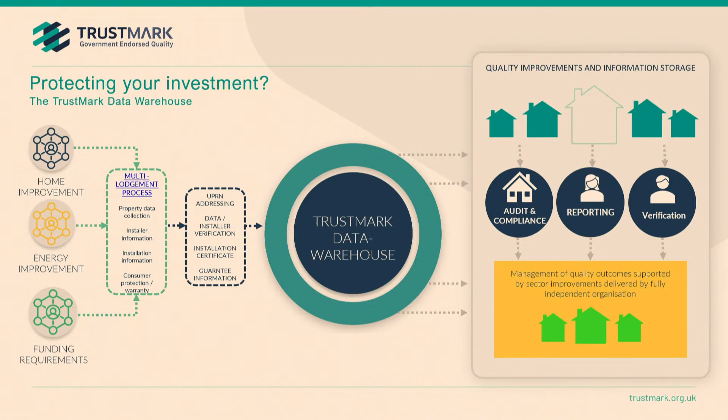This slide is just a data warehouse. So we now, for the government and for the lenders, have to run a data store. That data store records who did what, when, where, how it's protected, and that will link into the passports in the future. So this is about building some security for business, security for consumers, and making sure that these all work together. And that is me, thank you very much.

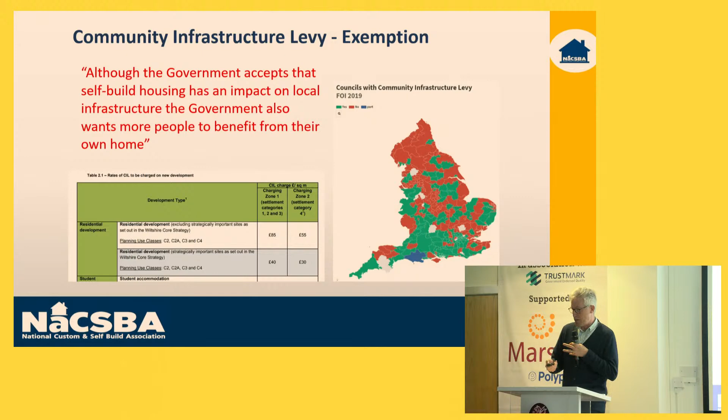It costs a bit more, but of course what you don't have to do is pay the profit that the big builders make when they develop their homes. So there are offsets and benefits, and broadly, as a result of these savings and structures, most people that self-build get a better home for a lower price than if they bought one brand new.

Every local plan, in fact since 2012, should assess the number of people that want to self-build, and set out how they are going to deliver that. In practice, many of them don't. Councils are often opposed by large speculative developers who don't like giving up the opportunities for other people to build their own. But they should be in local plans.

The last bit I wanted to talk about is the boiler upgrade scheme. We've talked about this already, but uniquely, if you are self-building rather than buying a new house from a speculative developer, you can access that scheme. It's the only new build process where you can. That's £5,000 off a ground source or air source heat pump, or £6,000 off a biomass boiler. So that's a bit about self-build and the opportunities for it.

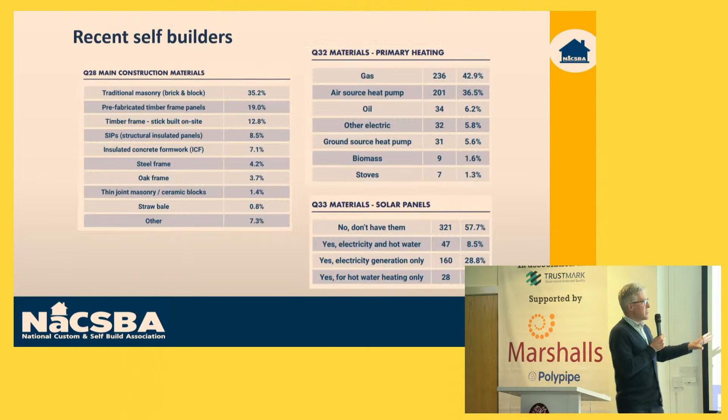I wanted to talk about what actually happens when people are given the choice in how they build their homes. The first thing is, given the choice, roughly 50% of people currently choose a sustainable heating source. Largely it's an air source heat pump, but there's ground source and biomass to a small extent. Something getting on for about half of all self-builders go for a sustainable solution.

And of course that doesn't happen if you go out and buy the house new. The other thing is that a substantial amount, something like 40%, opt to have solar panels. Again, that doesn't happen on new homes when people aren't given the choice.

Then we looked at what people build with, and again, people choose substantially different methods of building when they're given the choice. About 50% of all new self-build homes are built using modern methods of construction, typically prefabricated timber panels, SIPs, another type of timber paneling system, and timber frame as well.

Again, when people are given the choice, the choices they make are very different from what they are naturally presented with. The advantage of many of these systems is they're built to give you difference within your home, and there are many reasons you may want that: taste, abilities or disabilities, lifestyle, family, values, all kinds of things. We've forgotten in this country that new homes can empower you and make your life better. Doesn't it sound weird to say that? Hey, I've got a new home and my life is better because of it.

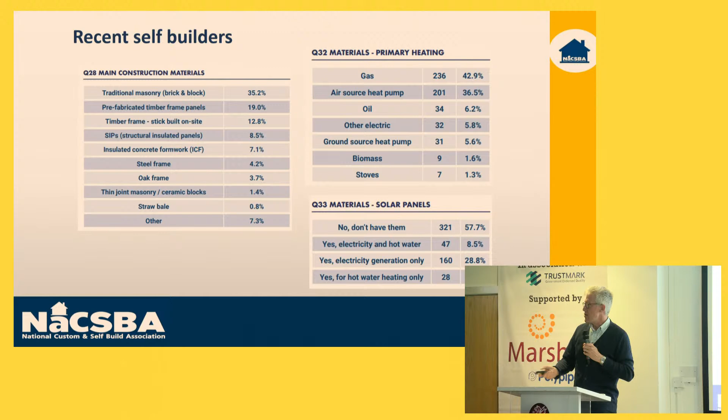In terms of future self-builders, it's much the same. They're looking much less at traditional masonry - it's still the largest type currently, but they're definitely moving away from that, towards the options that exist. When we asked how important sustainability is, we got massively high scores. So the challenge is that if we give people the choice, control and confidence that what they are getting is what they paid for, then they will make the right choices.

Are there some challenges? There are. We have a really bizarre thing in this country where most large mortgage lenders will not allow you to buy a home that isn't made of brick and stone. They'll have a few exceptions, like Huf Haus, which is a prefabricated house, but they won't allow them generally. So we've got some work to do with lenders, because if we're going to move towards net zero, we need to be using more timber, more straw, more sustainable resources in building our homes.

This really winds me up - I spent 25 years working for a mortgage lender - but they will not lend you more to build a house that will cost you less to run.

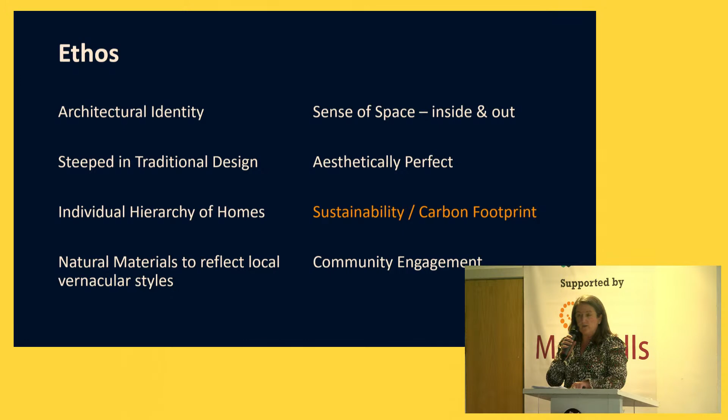So all these aspirational points sound fantastic, as you've just seen in the last slide, but how can we ensure that we future-proof our homes in a sustainable but financially viable way? Rather than see sustainable build as a huge mountain to climb, it's important to see it more as smaller bite-sized areas which can be cherry-picked according to your build and business model. As we become more accomplished and understanding of the sustainable build sector, we can add to our business model and the technologies we offer. It's not just about installing expensive trailblazing initiatives either.

For instance, written policies issued to site staff and contractors on matters such as waste and recycling methods are also a useful way of achieving buy-in from the whole team. So our bite-sized pieces of the jigsaw were eventually determined into 5 rules of thumb: planning, subcontractors and suppliers, construction, design and interiors, and arguably most important to us, the environment and biodiversity.

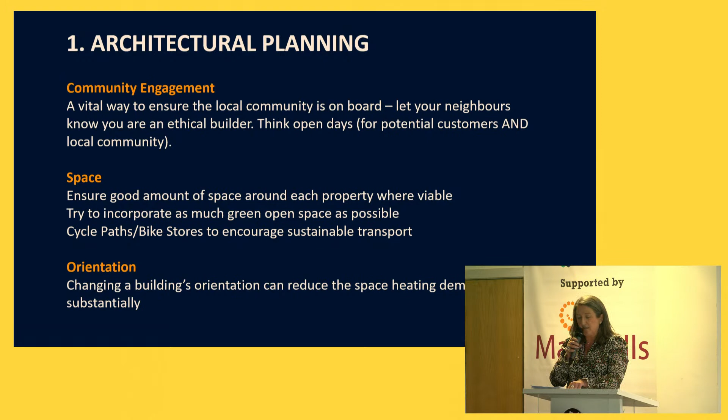So architectural planning: it's so important to choose an architect who is equally committed to the ESG movement as we are. The way ideas are bounced about the table from the off, well before planning application is submitted, is so vital. An application that can clearly be seen to have a well thought out sustainability offering will only serve you in good stead through the planning process. Starting close to the end goal for the planning officer rather than at the beginning avoids endless back and forth with the various planning stakeholders. These are rather obvious points, but a good reminder of how the architectural planning stage of your build is vital to the success of it.

So subcontractors and suppliers - again rather obvious points here, but they're important to drive your team to succeed in the sustainability goals within your own business model. Team buy-in, both internal and external, are paramount for the success of your aspirations in this area. Don't be afraid to ask the awkward questions, you'll be surprised by the response. Most suppliers and subcontractors we deal with already have amazing sustainability policies in place and offer lots of things such as packaging removal and recycling, and our groundwork teams were happy to put HVO oil into their site machinery, so that was fantastic.

This is a little difficult for me because I'm no professor of MMC. But at Galion, we use a number of different building techniques as well as some more traditional methods. We've heard today about timber frame and other methods. We also use porotherm clay bricks, and we use our own local stone sourced on site.

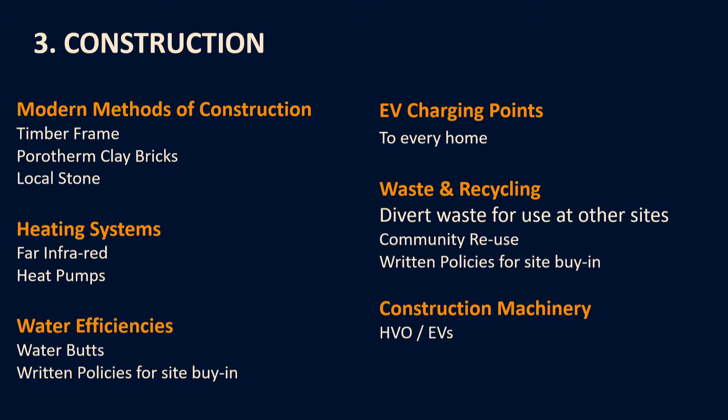So a good mix of this MMC is a great place to start in order that you can identify what works best for you and your subbies.

Here I've listed a few of Galion's initiatives to help make our homes and our business more sustainable. Some of these are becoming conditions of planning, for instance EV charging points are now a requirement on most developments. But back as far as 2018, we were deemed trailblazing by offering EV charging points, sustainable heating systems, solar PV, all included with the price of the property. We're future-proofing for our customers, and they're so intent these days on having all this included. At the end of the day, a developer offering a new home with some or all of these installed will sell better than the developer next door who is waiting for legislation to hit.

Design and interiors - this is where the arguments between the commercial team and the design or sales team can be most eye-watering. The cost of some of the more sustainable interiors can be accused of being prohibitively expensive. But at Galion, through our B Corp journey that we started last spring, we are committed to take a little less for ourselves and put back a little more into the community we serve. It's a good feeling. Our customers see it and understand it, and they want it.

These are self-explanatory, but to take one example, Dulux is a sponsor for an initiative utilising leftover paint to brighten up underserved community projects, such as care home murals, children's hospices, and food banks. They've all benefited from the scheme.

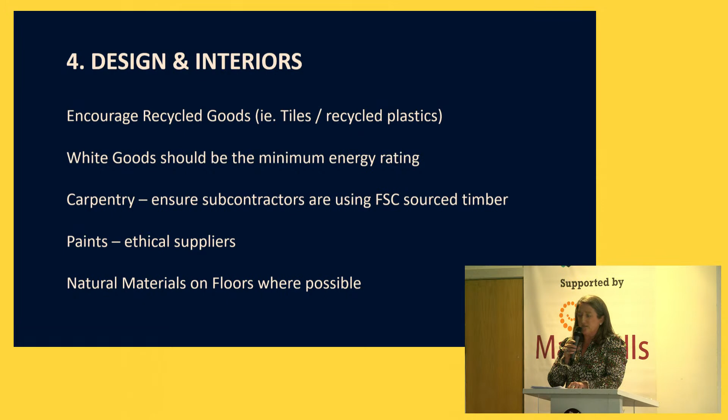Grasscrete parking spaces look good, better than tarmac anyway, and create habitats for smaller insects and bugs. And finally, welcome gifts - rather than the usual bottle of fizz or bunch of flowers, we pack a little hamper full of environmentally beneficial bits and bobs like bee bombs for planting and hedgehog houses for the larger gardens.

So the following set of slides represent a case study of Galion's flagship development in Keinton Mandeville called Lakeview. I thought it might put the rules of thumb into a little context for you. Lakeview consented in January 2017. Galion, after the consent was issued, set about developing its team for construction to start in summer 2018. The site is an old shallow quarry, so the possibilities for biodiversity net gain were endless.

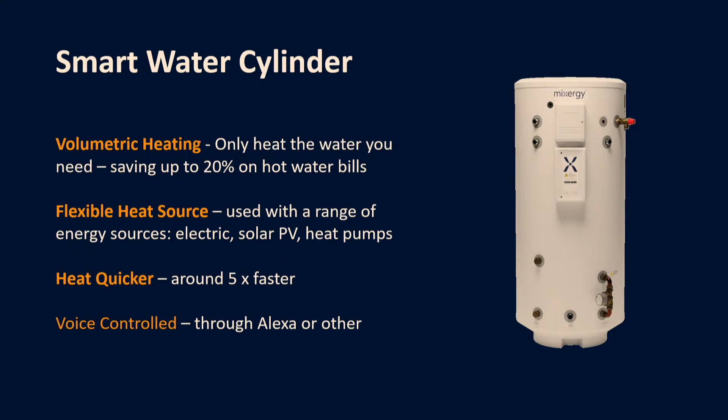So smart water cylinders are also part of these last 3 homes that we've installed. It's proved most welcome amongst our customers and will do at our latest development in Baltonsborough. The ability to understand your usage and only heat the hot water that you'll need offers a vast energy saving. Although Tomas will disagree with me there, so I might have to take that back. But the customers are pleased, and so it's a win-win in our view.

Finally, but most importantly, it's good governance. Write beautiful policies. Be kind to your team. And we're all in it together. So lead from the top and truly make a difference for us all to enjoy. Small adjustments to the way we build can really have a lasting impact on us and our future generations.

I'd like, if I may, to keep you from the bar for a little longer, just a couple of minutes, to finish with a short film produced in collaboration with 6 other SME developers from around the country. I hope it inspires you as it does us all at Galion. Thank you.

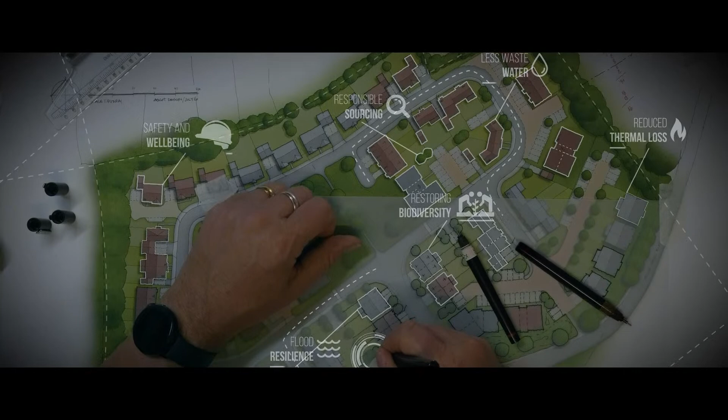There's a long list of things to consider when choosing your new home. But how often do you think about the environment and sustainability? Hundreds of thousands of new homes are built in the UK each year, but few are made with environmental and social impact at the very heart of their construction. This has brought about a rapid change to our planet's needs, and with our social and environmental future lying in the balance, we can't afford to get this wrong. Sustainability cannot be an afterthought. It has to be ingrained in our designs and evident in all we do.

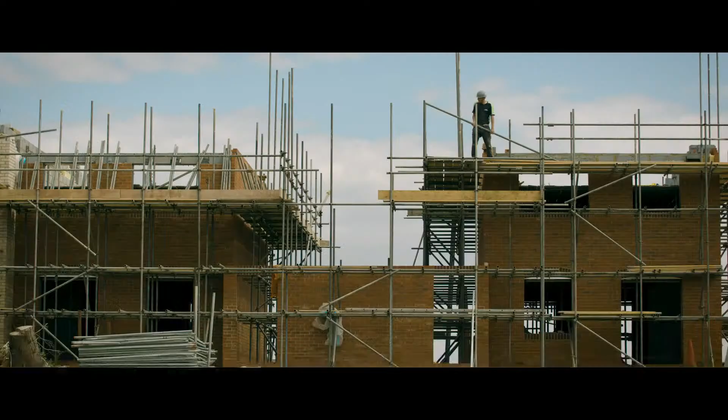As a regional home builder, each project is an opportunity for us to shape the future of home building and leave the world a little better than we found it. This is why our suppliers, regardless of their size or scale, are consciously chosen for their belief and commitment to the bigger picture. Together, we put our message in the materials, and the materials where it matters. Our homes are more than just bricks and beams. They're a breath of fresh air, and one step closer to redressing the environmental balance.

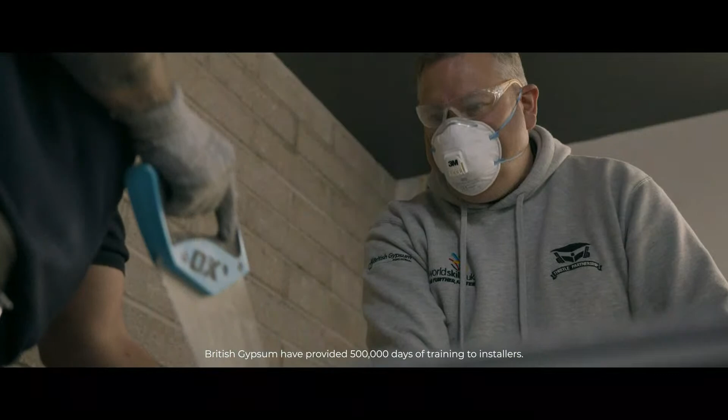Our ambition stretches beyond the boundaries of our developments, building better communities, leaving behind a local legacy, supporting schools and charities, and paying local tradesmen for a job well done. Together, we're closing the skills gap, embracing equality, and celebrating culture. Addressing outdoor problems with indoor solutions, saving gas, electricity, water, and waste wherever we can. Making homes that are fit for the future through thoughtful design, product development, and extensive research. We're leveraging tomorrow's technology today, because what we do now will be judged by generations to come. In choosing us, you're choosing to make a difference.